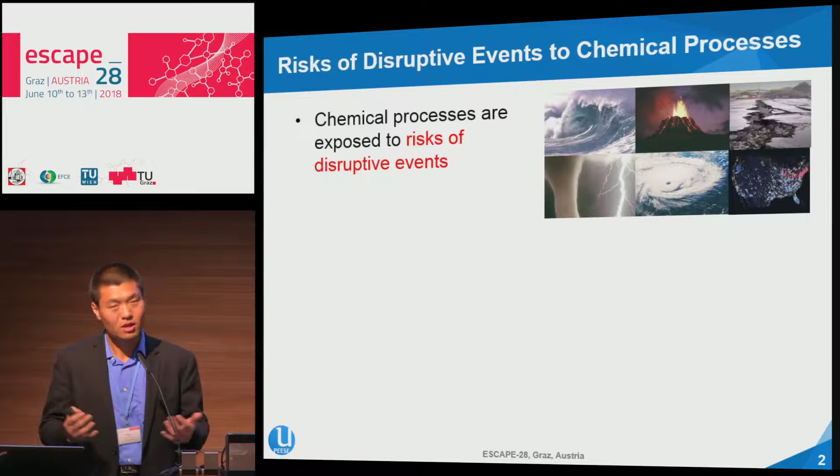So many of you have probably seen things like this, that our chemical process systems are exposed to a variety of risks of disruptive events. This could be hurricane, could be earthquake, could be tsunami, or even some kind of cyber attacks and breakdown. So there are clear evidence showing that these disruptive events could lead to critical damages and disruptions to processes.

For example, 1 year ago, Hurricane Harvey visited the Gulf Coast of the United States, and it damaged about 10% of the nationwide petroleum refinery capacity. It took more than 4 months to fully recover from this hurricane.

Early this year, one of the very large liquefied natural gas plants in South Asia, owned by ExxonMobil, was completely shut down and damaged due to an earthquake. And it took almost 3 months for them to recover from this earthquake.

So all these disruptive events have something similar in a way: they first cause disruption, then it leads to some sort of loss of performance and economic performance. So the question we want to ask is, how can we design and operate this chemical process against these disruptive events? Or how can we make our system to be more resilient?

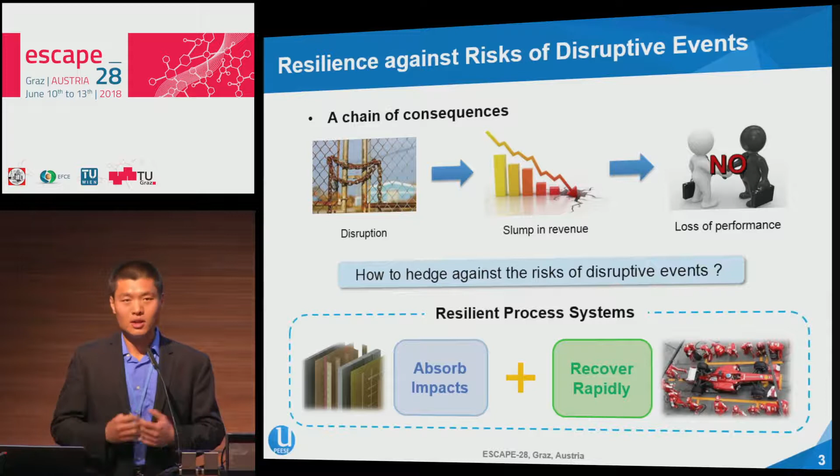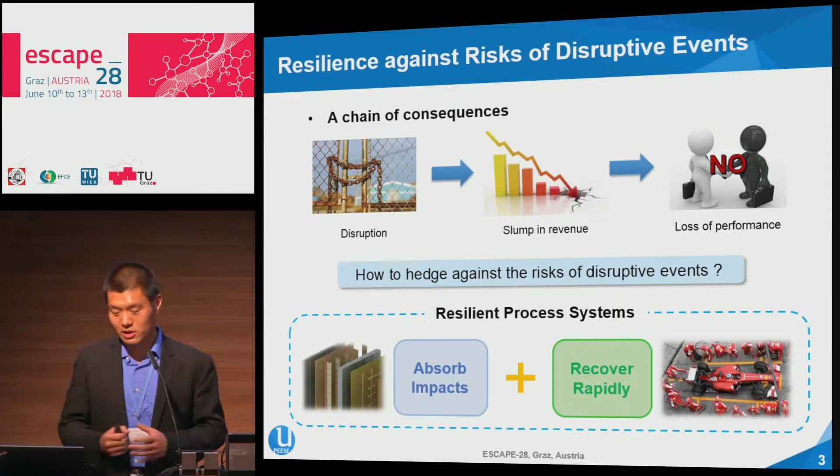In this particular case, we need to deal with 2 aspects. First of them is we want to absorb the impacts from all these disruptive events and all these uncertain cases. And the second aspect, which is quite important also, is to recover quickly from all these damages. So towards a very comprehensive resilient process systems, there are 3 major research challenges we need to address in this work.

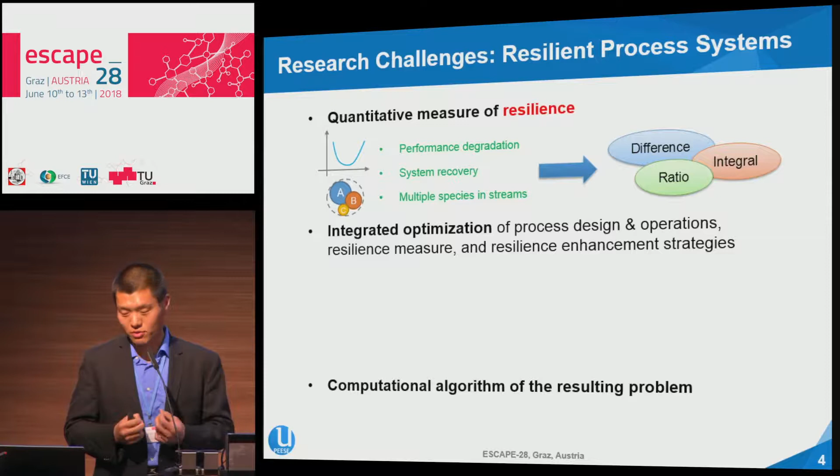The first one is how can we quantify resilience? We need to find a quantitative measure for resilience before we can conduct any kind of systems analysis and systems design. So in particular, this kind of resilience metrics should account for a variety of factors, such as performance degradation, systems recovery issues, and also more importantly, from chemical engineering perspective, the multiple species in streams in the process systems. And there could be a variety of algebraic operations involved in the calculation and analysis.

The second challenge is how can we develop a holistic and integrated optimization framework to account for a variety of design and operational decisions, to incorporate the quantitative metrics for resilience, and also to account for many possible resilience enhancement strategies, which are very important, and we'll get into this in detail in the next few minutes.

And the last issue, which many of you have heard about, is how can we address the computational challenge to avoid our computer catching on fire like this.

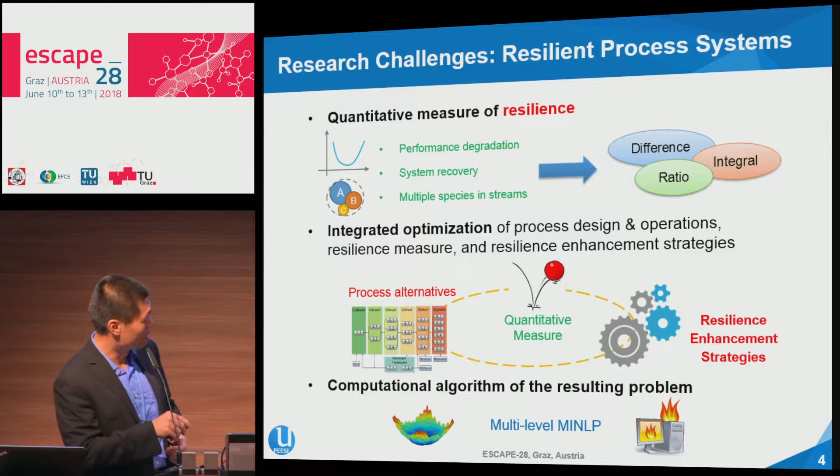So towards these 3 research challenges, the contributions of this work involve 3 perspectives. The first one is we propose a first-of-its-kind quantitative metric for resilience for process systems. This should be particularly suitable for the design and long-term planning of chemical processes. The second contribution is we propose a novel modeling framework that accounts for economics, performance, and resilience through a multi-level adaptive robust optimization approach. And the third contribution is a novel and efficient computation algorithm that could help to solve all these problems in a few minutes. So let's go into these topics one by one.

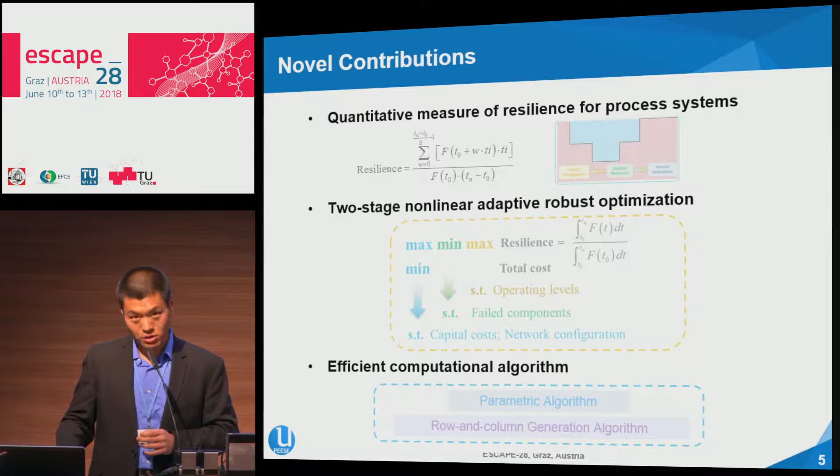Let's first talk about this quantitative measure for resilience. How it looks like after we have a disruptive event, or after we have some sort of damage to our system. So the figure here shows more like a performance curve that you could typically see in any system we're talking about. The x-axis will change with time, and the y-axis is the so-called system's performance.

When the system is under normal condition, the performance will be somehow flat, always under small disturbance, which is given at the beginning of this time period.

But let's say at time t0, we have certain disruptive events, such as hurricane or earthquake or any kind of event. Then the system's performance will degrade over time because of the absorption of impacts we have throughout the process. Then by time t1, after the impact propagation phase, the system will try to recover because of our maintenance and operating phase.

So after the system's recovery phase, eventually it will resume to normal operations going forward over time. This is the so-called systems performance curve, or the performance degradation and recovery curve, for some sort of resilience measurement.

There are many existing publications looking at resilience, but most of them, if looking at the design phase, will be more in the civil engineering or construction engineering community.

One of the most well-known, most acceptable metrics for this kind of performance looks at a ratio of two areas. The first area is essentially this blue box here. It means that if the system is running under normal condition, or could fully absorb all the impacts and damages, then how the system's performance changes over time is an aggregation over this rectangle area. This is given as the denominator at the bottom here.

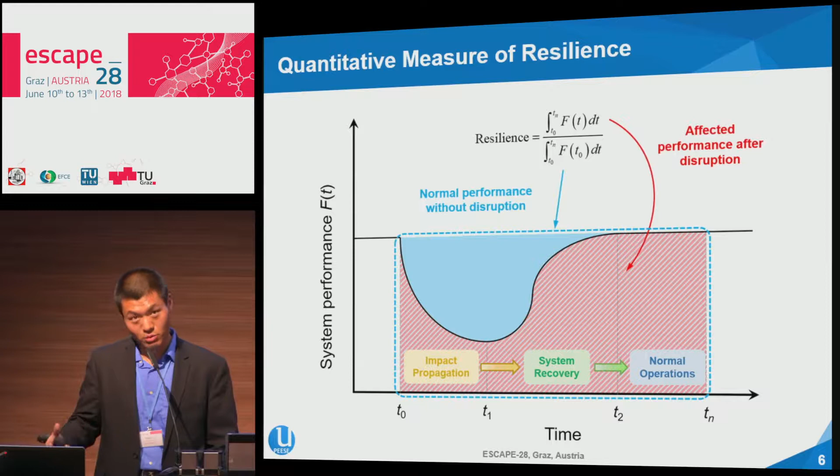So how will these metrics translate into our chemical engineering or process engineering community in particular? For most process systems, it consists of a variety of process units, and this unit could be a single reactor, a distillation column, or any kind of unit operation equipment.

So for each specific unit, there could be two modes. There's something we call a stepwise change, which people typically use in dynamic programming: either the unit is operating, then it works, or the unit fails, then it doesn't work.

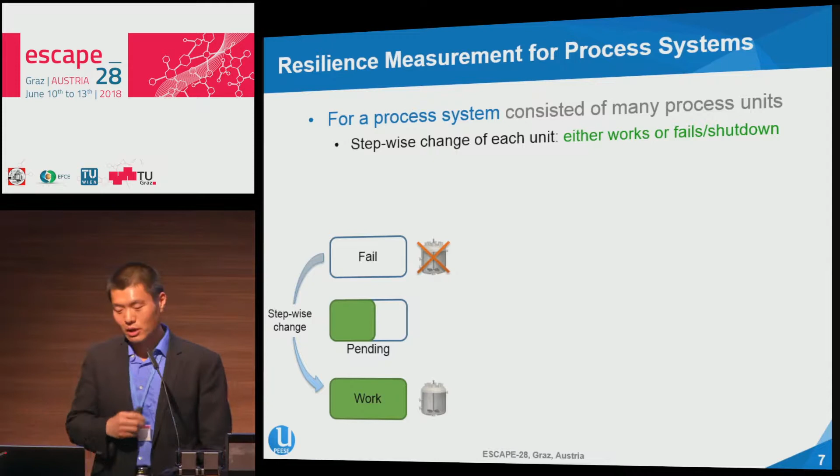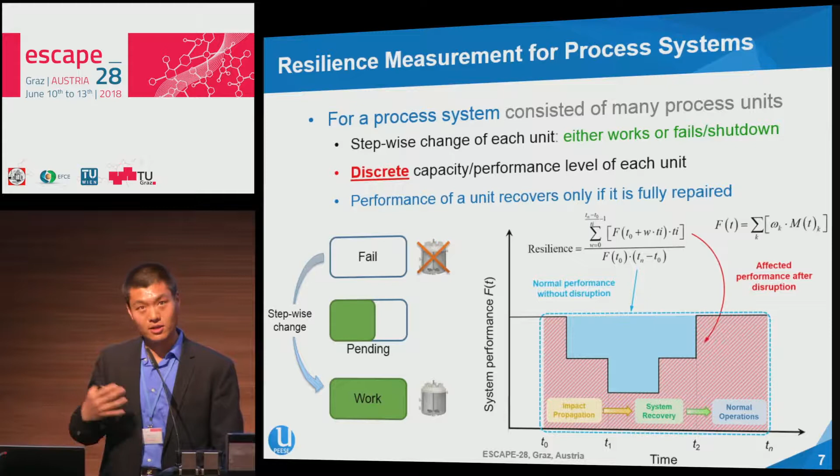By looking into this approach, we could discretize the performance or capacity of each unit, and consequently look into this performance curve changing over time with step functions. With the help of these step functions, we could translate the integral into summations over time. This is how we translate the resilience metrics to be more process engineering and systems engineering oriented for this quantification approach.

The next aspect is resilience enhancement strategy, which I mentioned earlier, and this is indeed a main difference between conventional process design—which looks into economics, sustainability, all sorts of impacts—versus resilience in process systems.

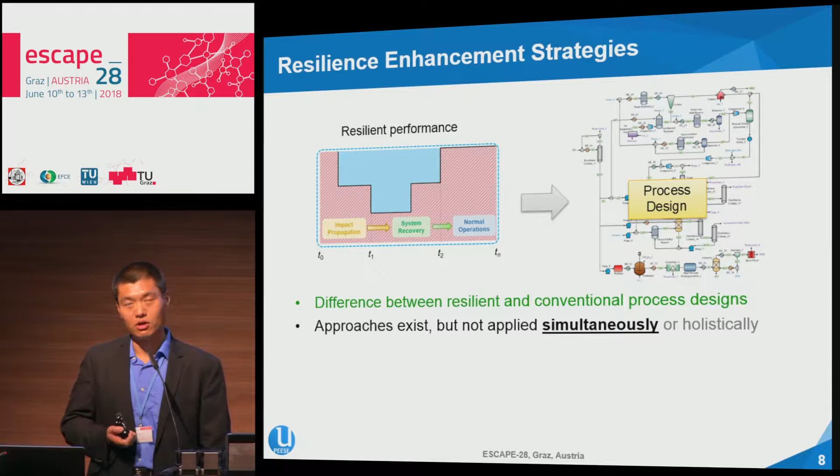There are a number of approaches to enhance the resilience of a given system, but most of them are not applied simultaneously or holistically, as you can see in this work.

Specifically in this contribution, we look into five resilience enhancement strategies, namely optimal design, extra capacity, parallel units, backup units, and optimal operating levels.

We'll get into these one by one in the next few minutes. Although some of them sound very trivial from a mathematical perspective, they are indeed widely applied in industrial practice.

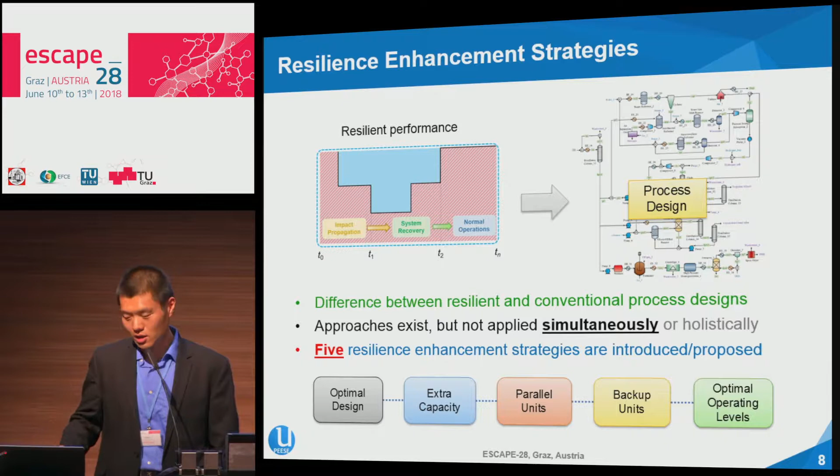The first one is called optimal design, and it's not surprising that once we want to design a process system, we want to make sure it's optimal. Optimal has many implications, and it really depends on what kind of objective we are looking for.

In this particular case, we can start looking into economics, but you could also look into the case that is most resilient or could recover the most quickly. This would essentially imply designs that give us the shortest recovery time for completing the same task. That said, there could be multiple options or pathways to complete the same task, so there are some trade-offs involved.

And the way you could model it is to introduce some sort of binary 0-1 variables to indicate the selection of units and selection of pathways. And that being said, all these design decisions have to be made here and now.

So these are for a first decision before any disruptive events or any kind of uncertain disruptions is observed. Second strategy, which sounds also very interesting and relevant, is to increase the capacity of process units. And it goes without saying that if you have some sort of pathway like this, with the feedstock going here, and you can go through producing product 1 or producing product 2.

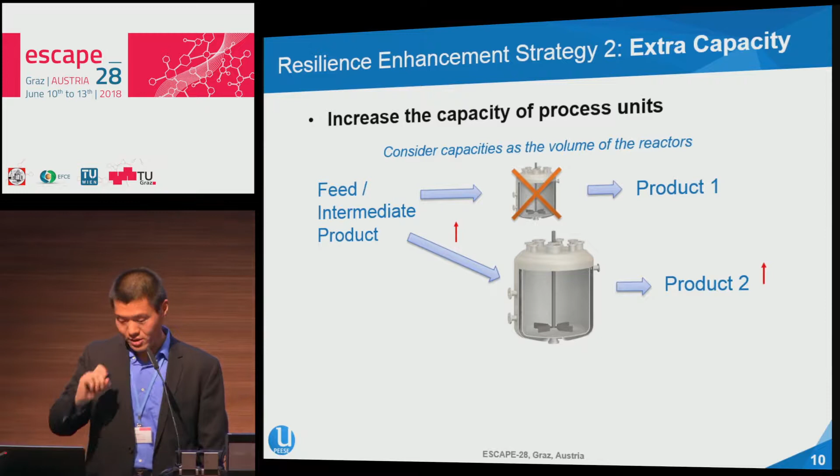So if we increase the capacity of the second unit, then in case the first unit is disrupted or damaged, the second unit could still absorb and convert all the feedstock into the products, although it could be a different product in this case. And the modeling is also very simple in the way you could look into some sort of constraints to

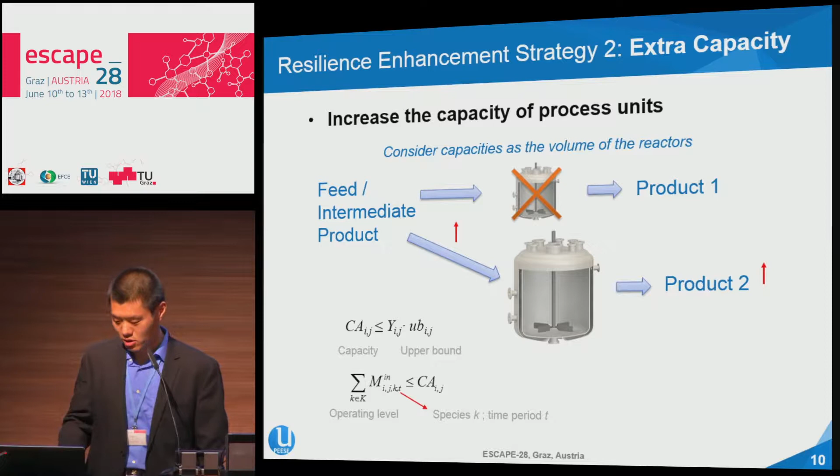capture the material flows in this strategy. The strategy 3 is the parallel unit, and essentially this is another way to introduce redundancy. So for instance, we could have a large distillation column, a separation unit to complete a separation task. Alternatively, we could separate the capacity into two smaller units.

And with these two smaller units, they could somehow enhance the resilience in case that if only one unit is disrupted or damaged, then the other one could still be working. On the other aspect, if all these units are damaged, then recovering one of them and recovering half of its capacity will be faster and more efficient than recovering everything we want to handle.

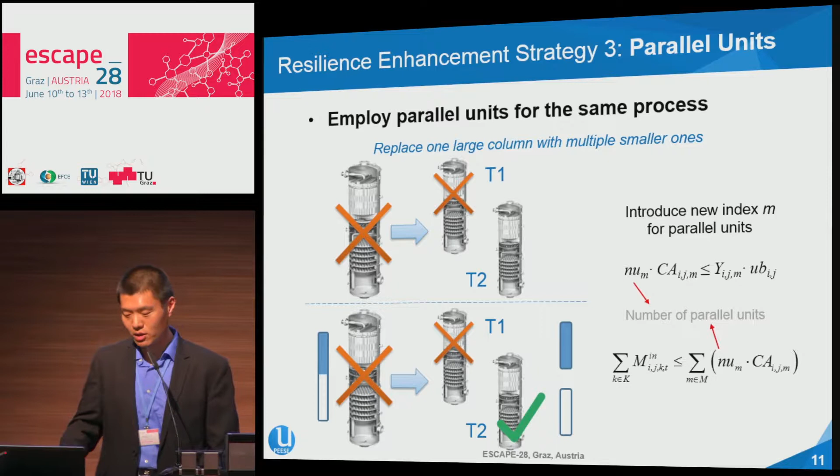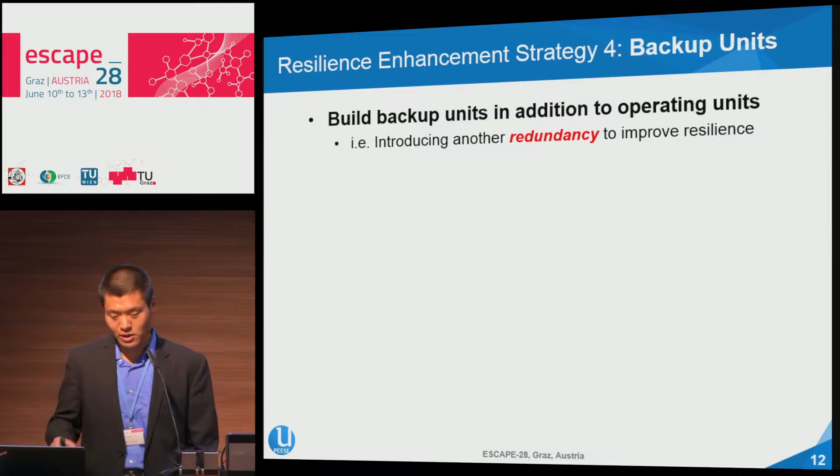So again, the modeling is trivial in the way that we could try to introduce some sort of inequalities and constraints to model this parallel unit strategy. The fourth one is another approach to introduce redundancy to the unit, and this is something you probably see quite often in industrial practice. For instance, we usually have something called backup pumps to capture all the possible disruptions of the transfer of liquid systems.

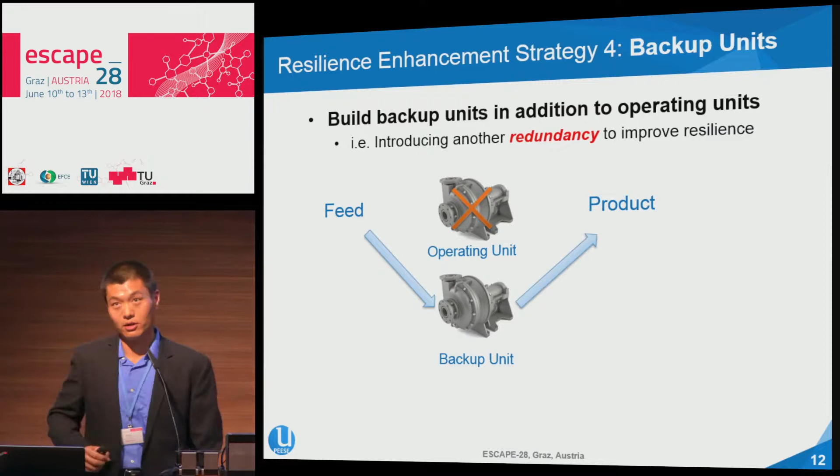For instance, you get a feed, you get a product, and going through one of the pumps. So if one pump is disrupted, then you can quickly have the backup pump to recover it and handle this fluid transfer task. So the modeling will be given as the ratio for backup capacity and the number of available processes in the equations here.

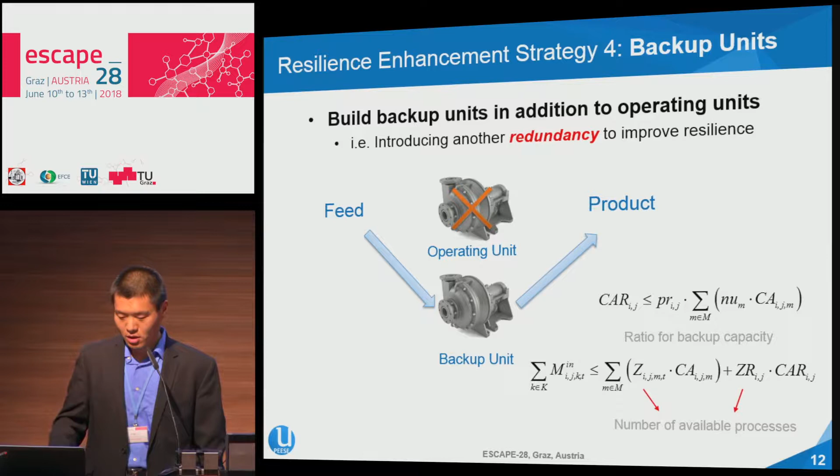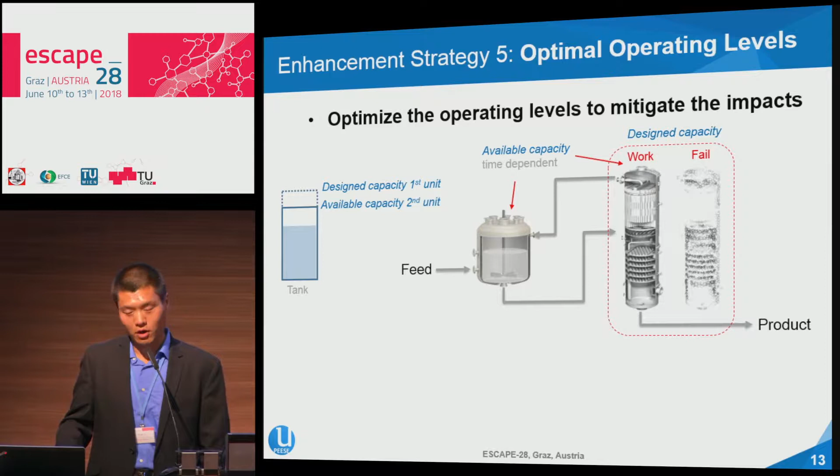The last strategy, which is something called optimal operating levels, would essentially look into the best worst case. So looking at, let's say we have a simple flow sheet like this with a reactor and a few separation units. Then if one of them has failed and the other one is working, the overall flow for the entire system can only take the one that has the minimum capacity throughout the process.

And keep in mind, we have multiple species involved in these streams. So this is one of the unique features for chemical engineering process systems. Another notable feature is that this problem will involve second-stage decisions because we will never know the real operating levels until we observe all the possible events. So this will be somehow like wait-and-see decisions that we can look into in a later phase.

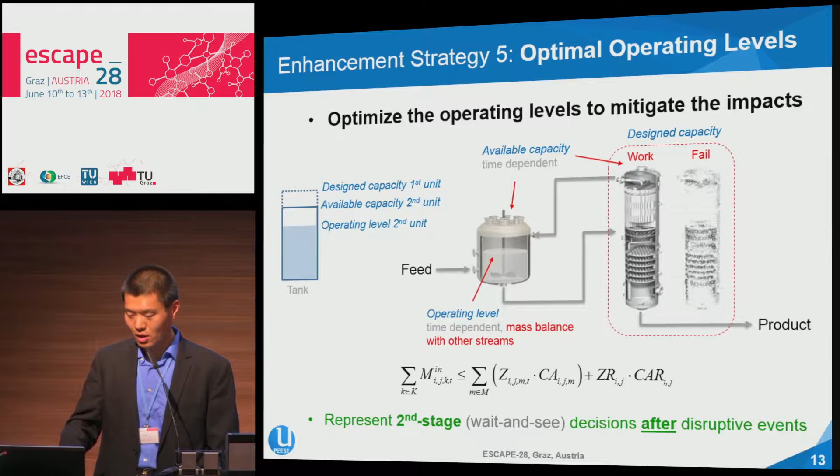So after we have all these resilience enhancement strategies and the quantitative metrics for resilience, we can incorporate them into a holistic systems analysis and optimization framework for resilience. And overall, this framework, as you can see in the figure here, involves three major steps.

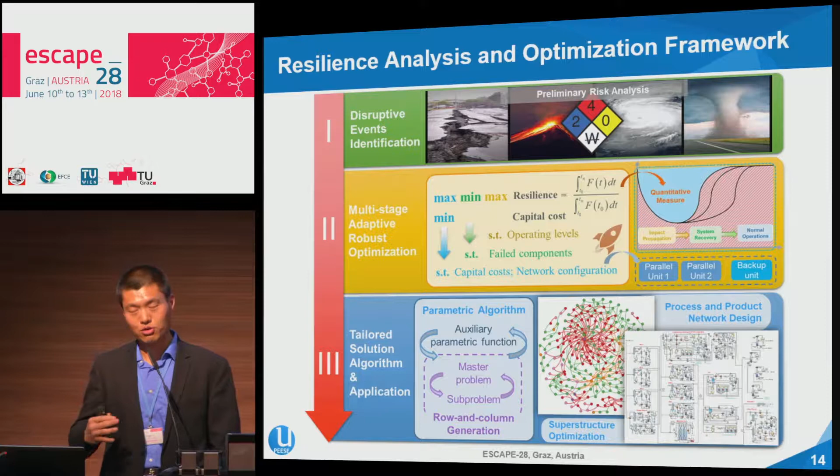The first step is to identify disruptive events, which is somehow going through the preliminary risk analysis and risk assessment, as we typically do in a chemical process design. In the second phase, we develop this multi-stage optimization model, and the third one is looking into the solution and applications.

So in terms of preliminary risk assessment, this is probably something you have seen quite often when we conduct industrial process design. In a certain way, we even look into the probability of these disruptive events, or look into the degree or severity of these events. You could generally classify them into three different categories: low risk, moderate risk, and high risk case. And in this particular case here, we only deal with the high risk and moderate risk case.

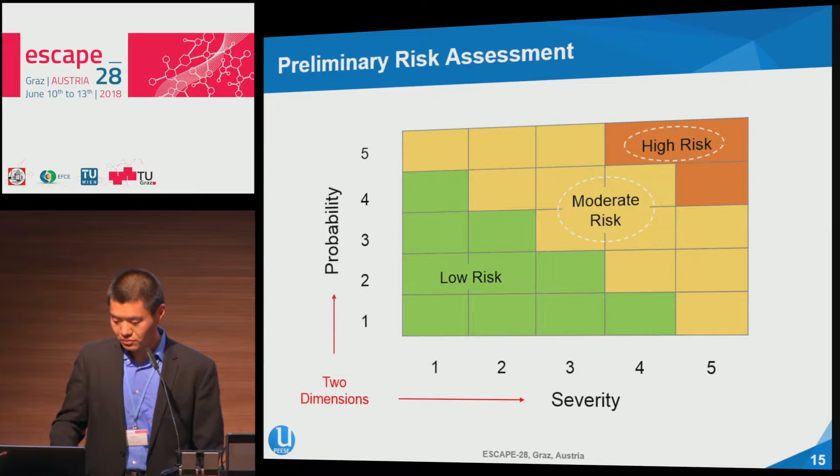Because for the low risk situations, we could most likely handle them through regular disturbance, and our control system should be able to balance them and recover the system automatically. After we conduct all this preliminary risk assessment, the next step is to develop a modeling framework and integrate optimization strategies. There are a number of methods, as you may know, that could handle uncertainty in a systematic optimization approach. This could be sensitivity analysis, could be stochastic programming, or could be robust optimization.

Sensitivity analysis is nice in that once you change the input to a certain degree of uncertainty, you automatically change the output. But the drawback is that this is pretty much a post-optimization approach, which is hard to incorporate into the design phase.

Stochastic programming aims to optimize the expected value. The major advantage is that it could handle all the probability distributions very nicely. But the drawback, on one hand, is we cannot identify the probability distribution very rigorously or accurately for all the disruptive events. And the second issue is handling a large number of scenarios could be very challenging.

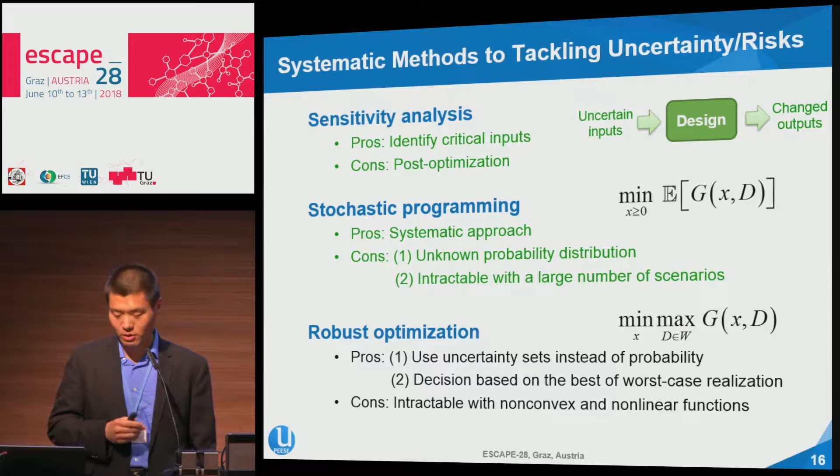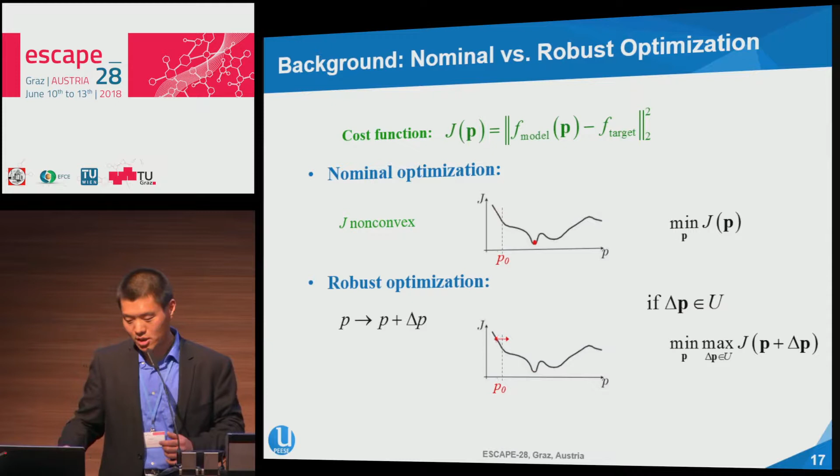So in terms of robust optimization, instead of looking at a single point, we first define something called an uncertainty set. With this uncertainty set, the point is no longer a single point, it becomes a disk, defined by the region of the uncertainty set. The way you run the optimization is you roll this disk throughout the profile. Once the disk is rolling down, what you can see is it doesn't really get trapped in this local optima, or in a region that is very sensitive or stiff to perturbations. Instead, you choose the other solution over here.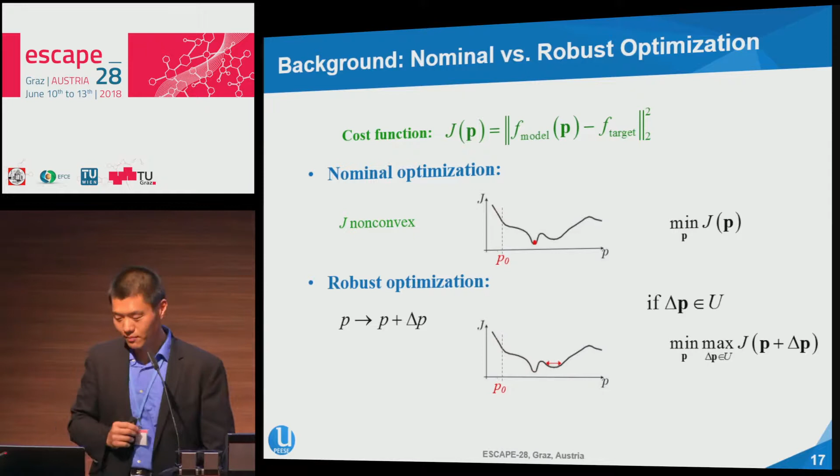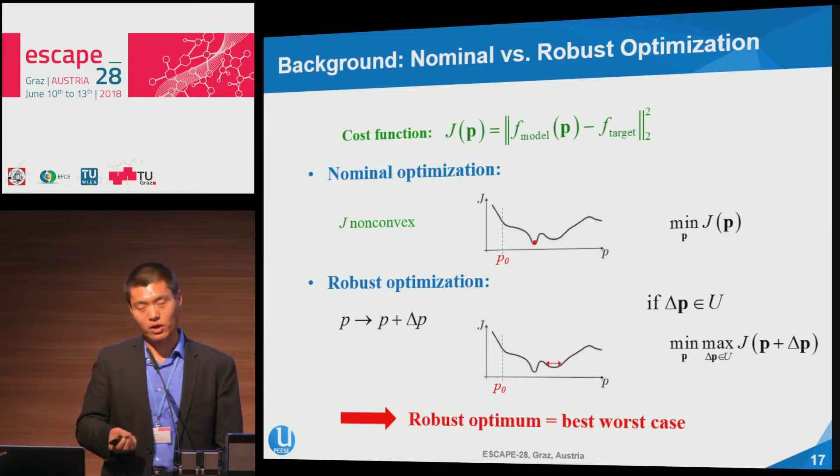So this is what we can argue: robust optima is somehow the case of looking into the best worst case. And I do want to point out that this best worst case is exactly what we are looking for in resilience.

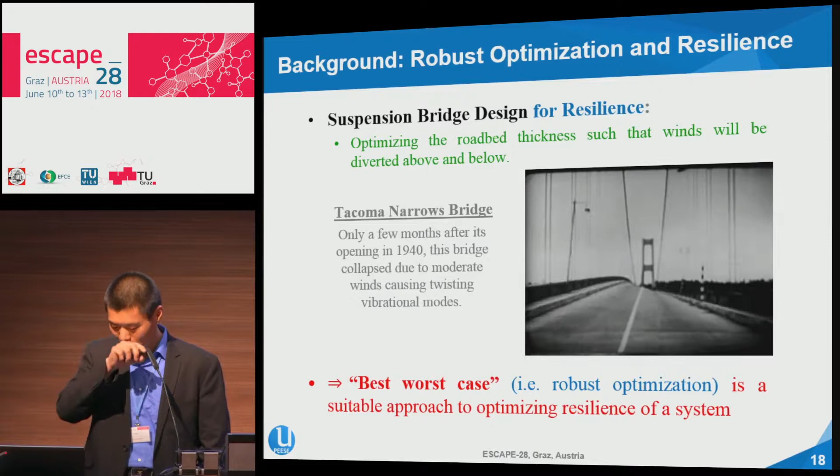What you can see here is the bridge perturbating, dealing with all these disruptions and disturbances. But what we want to do, essentially, is find a case that will perform best under the worst case realizations. So this is one illustration to show you that robust optimization could be a suitable approach to looking into the resilience optimization of a given process system. This is a concept that we have learned from our colleagues in civil engineering and construction engineering.

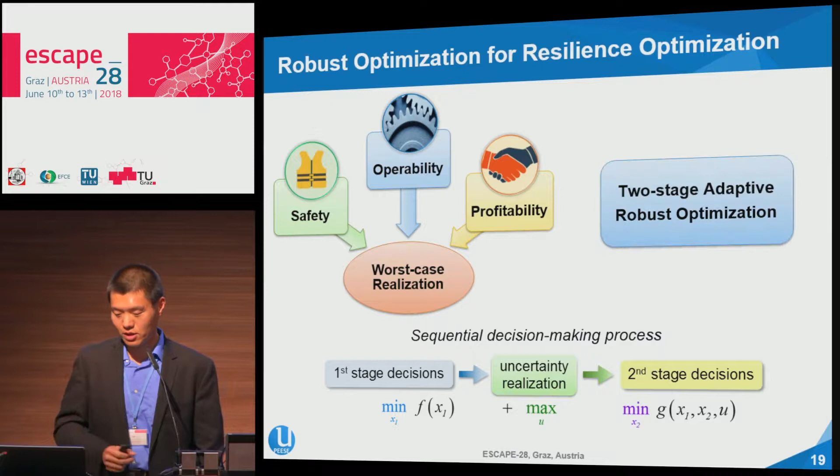Moving forward, we are looking into this resilience optimization in order to balance a variety of issues, and more importantly, to hedge against the worst case realization. This is indeed a sequential decision-making process. We need to make the first decisions — essentially all the design and network connectivity decisions — and after uncertainty is revealed, we make a second stage decision, or all the operating decisions. This approach could be formulated in a min-max-min form, ending up using something called two-stage adaptive robust optimization. Mathematically, this approach could be written in a general form like this, where we have X given as the here-and-now decision.

We get Y, which are more like wait-and-see decisions, such as the material flows and operating levels, as I mentioned earlier, with uncertainty realized before the wait-and-see decision and after the here-and-now decisions. This approach tends to be very suitable because it could well represent the sequential decision-making process we use in chemical process design, and these recourse decisions could help us adjust possible feasibility issues.

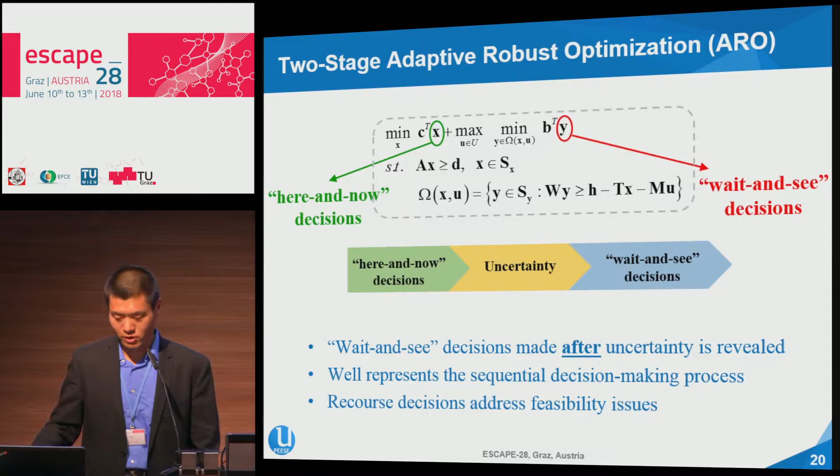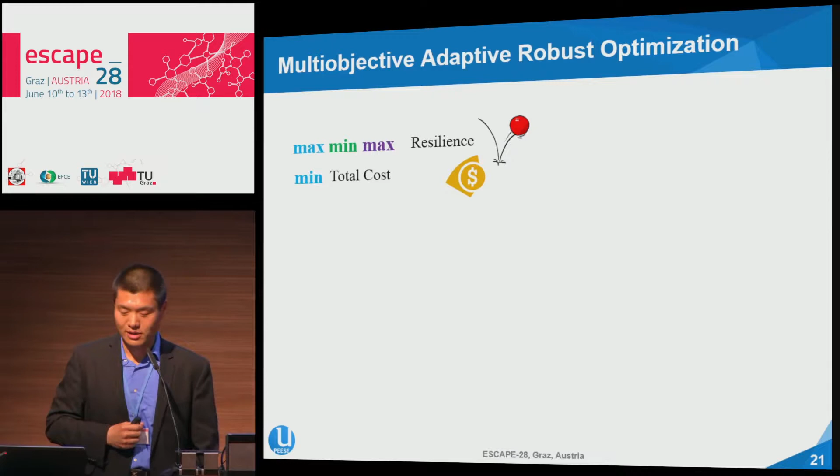For this particular case, we have two objective functions to look into. One is looking at resilience, and as we mentioned earlier, we can use a two-stage adaptive robust optimization looking into a max-min-max case. The other objective is to minimize the total cost. This was subject to a variety of constraints, such as network configuration, technology capacity, and capital cost evaluation.

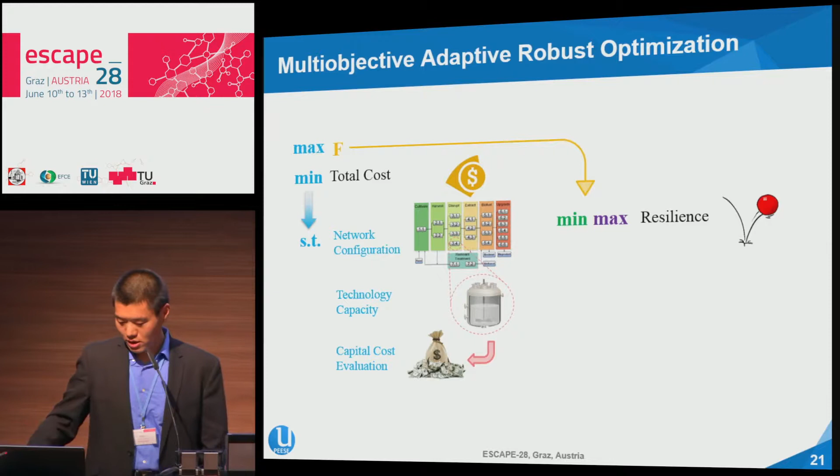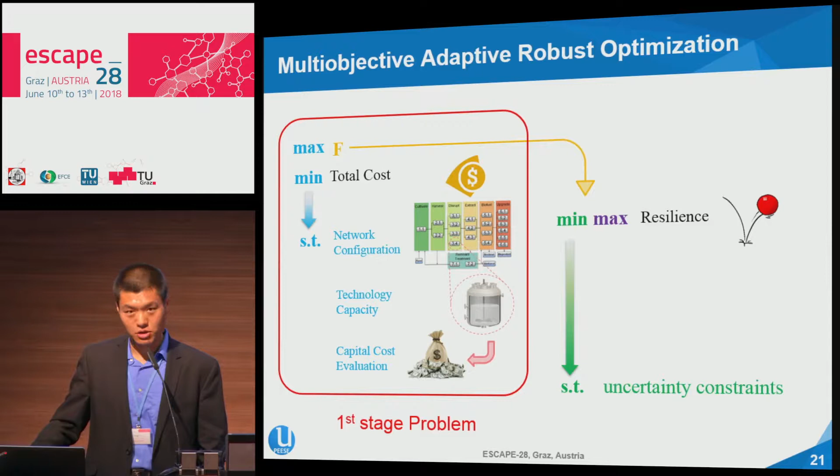For this particular case of resilience metrics, as we mentioned earlier, we had to deal with robustness and disturbance. This should be given as a min-max case here, and further account for all the first decisions that are made here and now. After disruptive events, we have looked into uncertainty constraints, and further account for issues on recovery, all the linking constraints, and most importantly, the mass balance constraints. All this second part will be considered as the second stage problem, or second stage optimization framework. So this is the overall idea of this multi-objective or bi-objective adaptive robust optimization for resilience analysis and optimization.

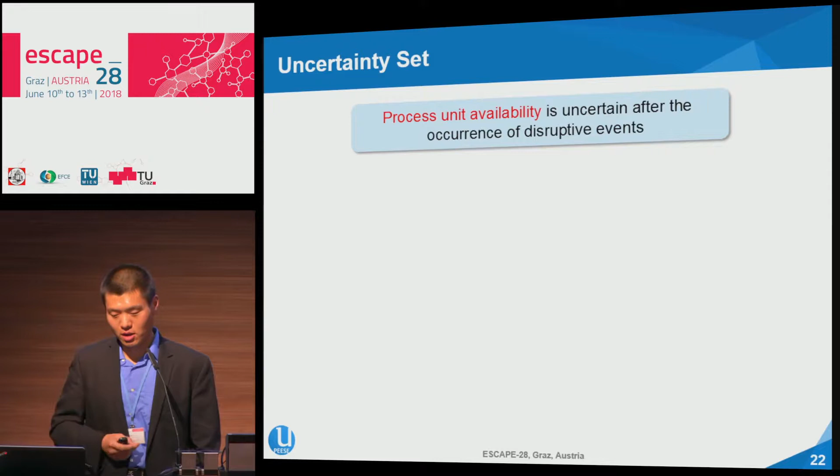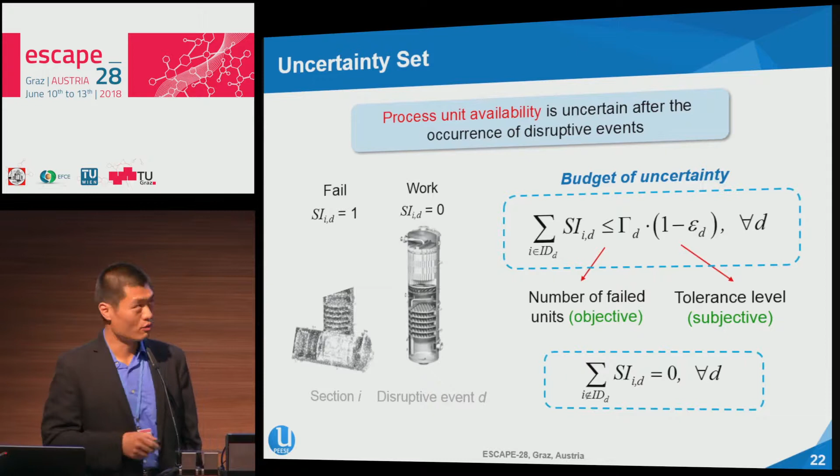The uncertainty set is one of the key issues to describe uncertainty in this case. What we use is something called process unit availability to capture uncertainty. This is something we don't know yet, but after the occurrence of disruptive events, we will have a better understanding and more accurate count. So this uncertainty set that we introduce would follow a typical budget-based uncertainty set, but involve an objective component in terms of number of failed units, and a subjective component in terms of the tolerance levels that we could handle based on this specific case.

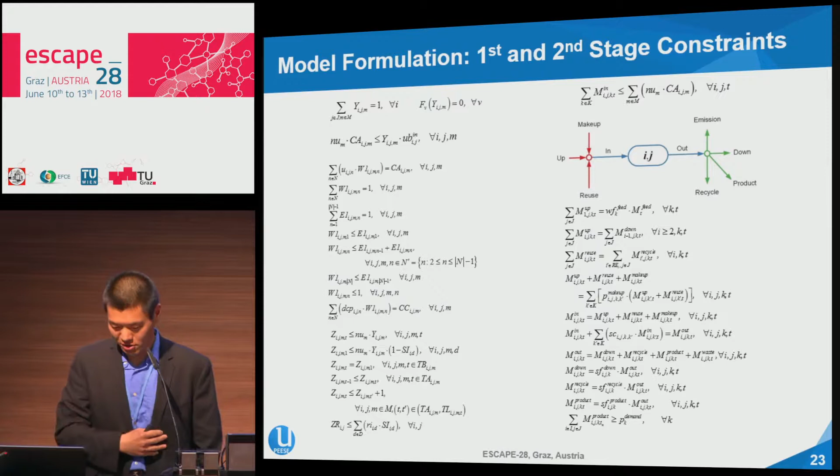Moving forward, you could write out equations. Again, don't let these equations scare you too much, because this is a typical approach in our systems community. What you can see here is we have some first decisions for network configuration, and then we have the first decisions also for technological capacity, followed by economic evaluations. All these equations are pretty much made here and now, before we design a process and before we see any uncertainty or disruptive events.

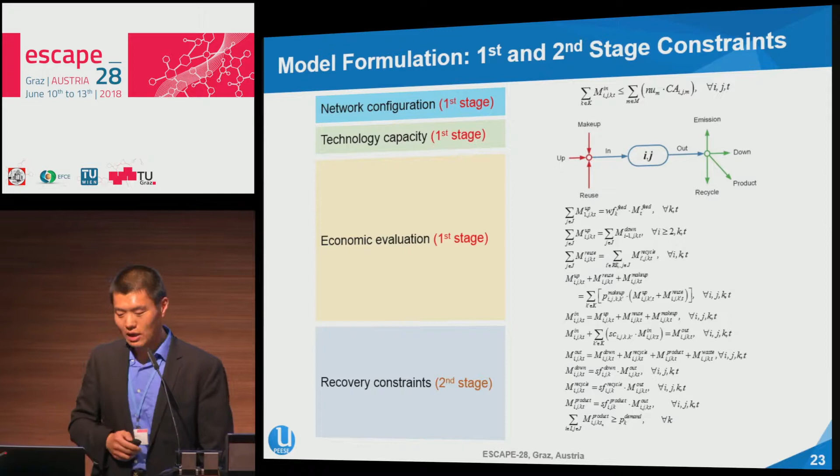Then we have a second decision looking into the recovery, looking into the linking constraints, and looking into mass balance and capacity issues. So this is the overall modeling framework in terms of constraints, and in terms of the first and second stage decisions.

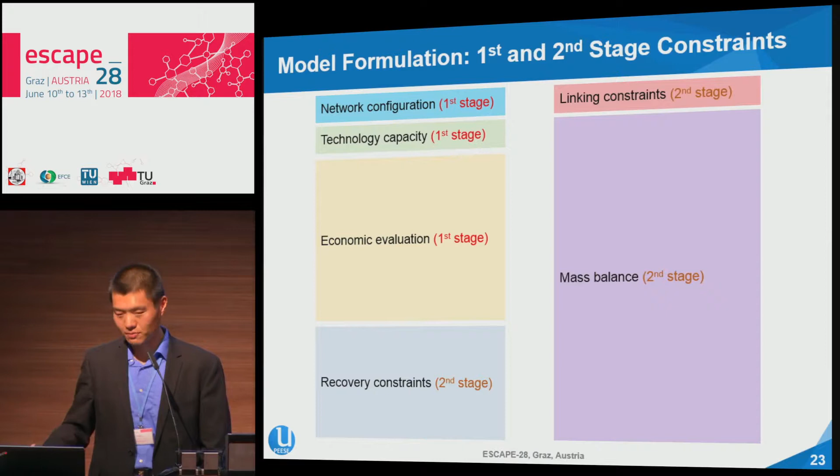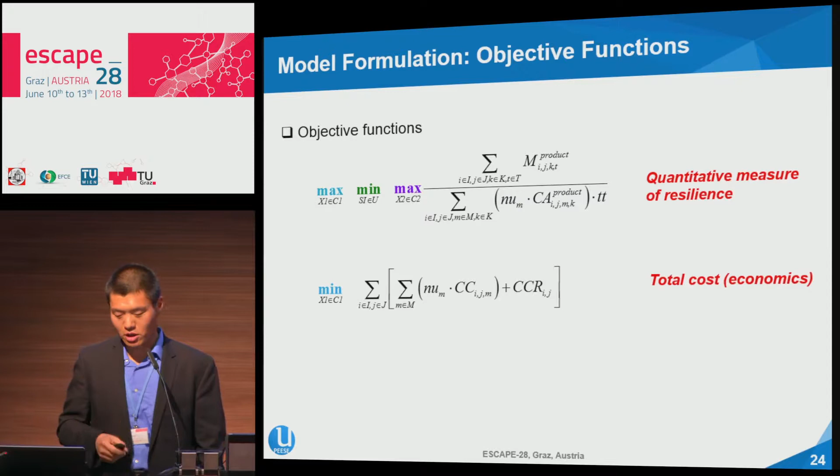In terms of objectives, as we mentioned earlier, the resilience metric will be given as a ratio form of real performance value over time divided by the ideal or theoretical performance over time under normal conditions. This will be given as a max-min-max form. The other objective, looking at the total cost in terms of economic performance, will be given as a mixed integer linear form. Both objective functions in this case reflect the intrinsic properties of the process system we are studying, and this will be a unique feature for this particular framework.

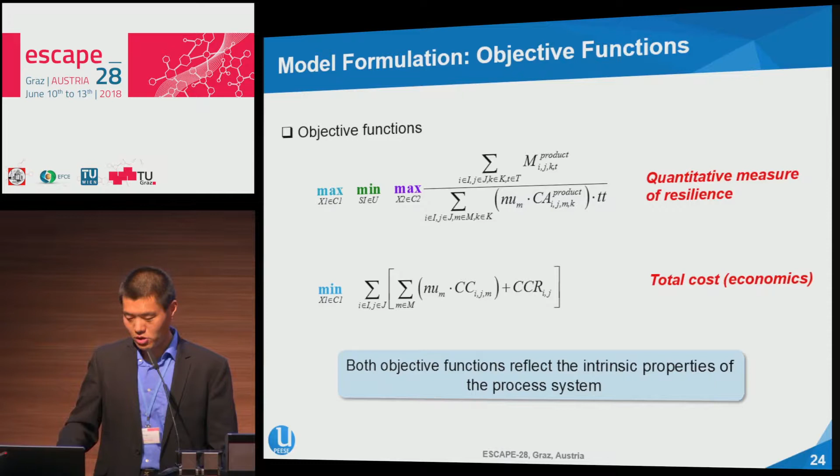The next issue we need to talk about briefly is how to solve this problem. As we mentioned earlier, robust optimization is very powerful and efficient to capture all the uncertainties and could be useful in this particular framework. But the challenge is on its solution. How can we solve something with 3 operators: max, min, and max? This is one of the challenges. The second challenge is we have 2 objective functions.

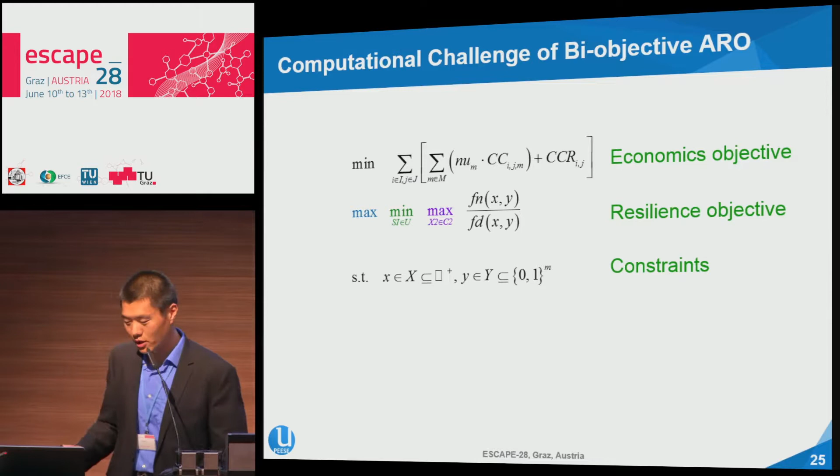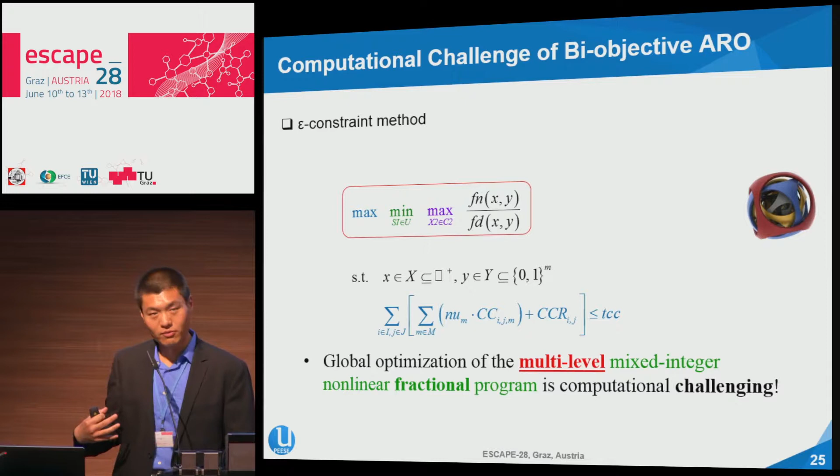One thing we could do, well sorry, this is x belongs to the real value—I think for whatever reason the computer did not display it. We could use something called the epsilon constraint method to transfer one of the objectives to the constraint, and this is something very straightforward. After you make the transfer, it becomes a single objective problem. But still, this single objective problem is pretty much a multi-level problem, kind of nested, 3 levels nested all around. And it's also involved with nonlinear terms and fractional terms in both the numerator and denominator.

So this problem tends to be very computationally challenging—multi-level optimization, mixed integer nonlinear optimization in particular. It could not be solved directly using any off-the-shelf optimization solvers, and this non-convex problem really needs some sort of global optimization algorithm to guarantee the solution quality.

So let me spend a couple minutes to show you how this approach could be tackled by investigating fundamental theory and algorithms in mathematical programming.

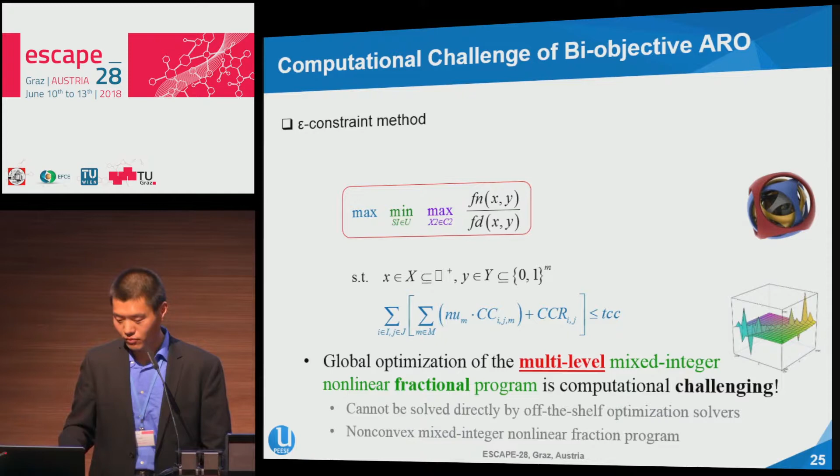First thing we can observe is this fractional term here. This was borrowed from an earlier series by Dinkelbach back in the 1970s, but also some studies in my group in recent years looking into a kind of parametric algorithm. The main idea is: for any mixed integer fractional problem like this, given as a ratio of two functions, you could look into its parametric subproblem. This parametric subproblem is essentially an embedded optimization problem, introducing parameter q and making it a minimization of the numerator minus q multiplied by the denominator.

So f(q) here is exactly a function, but it doesn't have an explicit algebraic form. What we could prove is that if we could find the value of q such that f(q) equals 0, then by solving this single level optimization problem — minimizing N minus q multiplied by D — with the optimal objective equal to 0, the solution to this problem will be exactly the same as the global optimal solution to the original one.

So that's exactly what the theory is all about. We can further prove that this function f(q), although it doesn't have an analytical form, has a very interesting property: it's concave, continuous, monotonically decreasing, has a unique solution when f(q) equals 0, and the subgradient for any value will be the negative of the denominator. These results were presented, I think 2 or 3 years ago, back at PSE in Denmark.

With these properties, we could really try to design an algorithm using numerical root finding measures. We start from an initial guess and then take these subgradients. Each time we solve this inner problem, we get an objective value and also a subgradient for free. So you can iteratively solve it until eventually you reach the optimal after certain iterations.

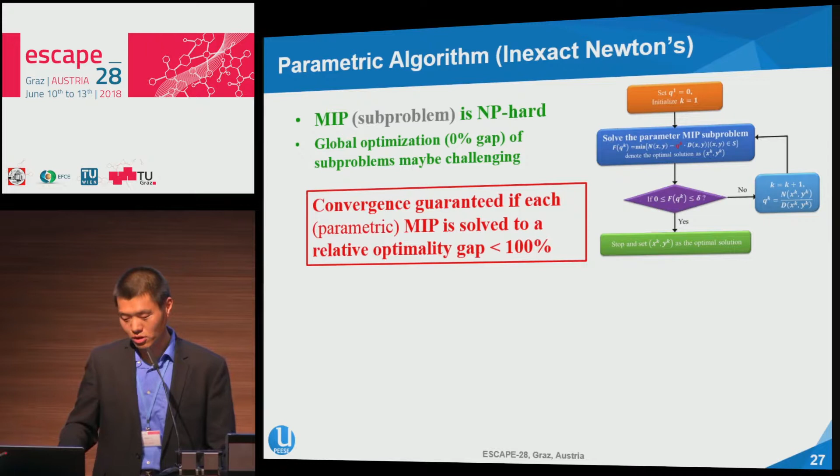So once we have this parametric algorithm, we introduce solving a sequence of subproblems and iteratively reach the optimal. One of the most powerful features here is that each subproblem does not need to be solved to global optimal. Instead, one of the interesting theories we introduce is: once you can solve these subproblems to any feasible solution within 100% global optimality gap, it will be fine to move forward and eventually guarantee convergence to a global optimal solution. This is something we call the inexact Newton's method, for applying to this problem.

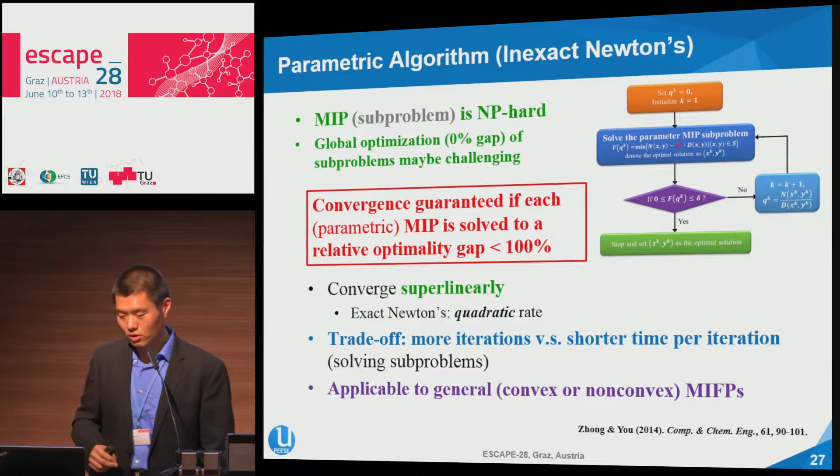This is a very powerful approach that could apply to any kind of convex or non-convex problems, even multi-level optimization problems. So we embed this approach into the framework we are dealing with — a max-min-max problem with a fractional term. We look into the parametric subproblem and eventually take these steps to solve to global optimal.

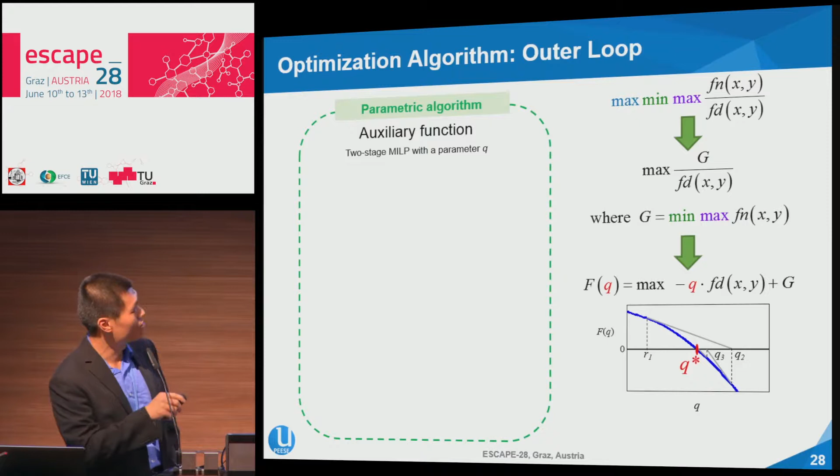The key idea here is that each subproblem will end up being a 2-stage adaptive robust optimization problem with mixed integer linear problems embedded within it. So all we do is follow a row and column generation algorithm by decomposing into a master problem and a subproblem, iteratively solving them.

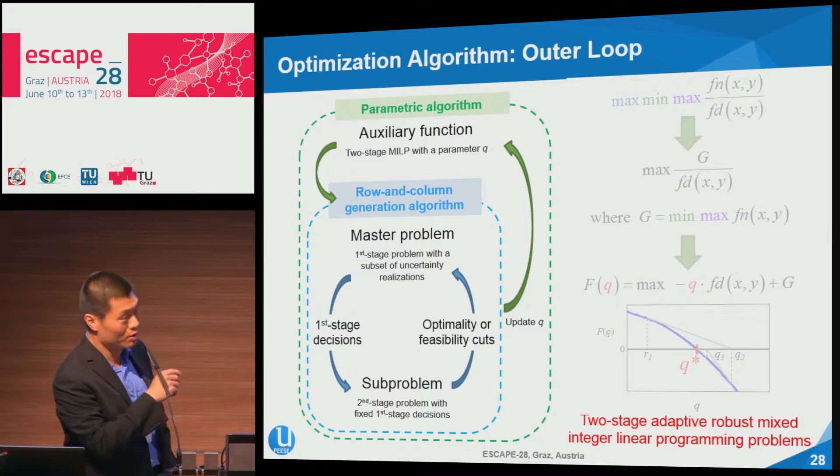We add optimality cuts and feasibility cuts until eventually the solution converges. The main idea is, through partial enumeration of all the extreme points in the inner problem, to eventually convert this multi-level ARO problem into a single level one.

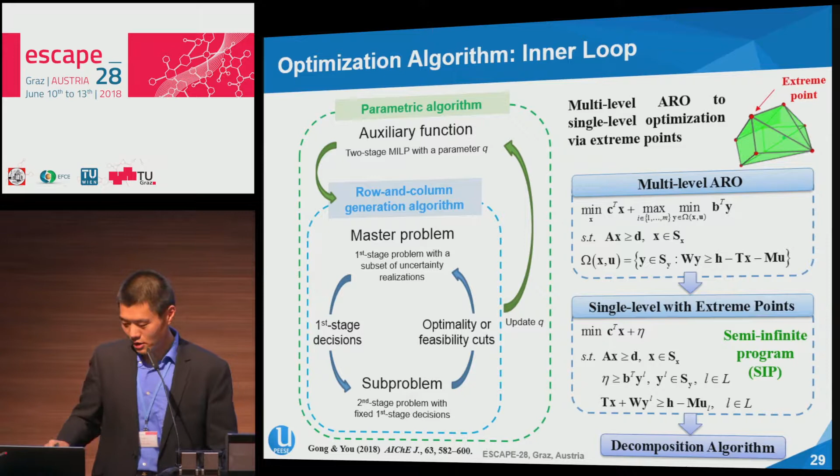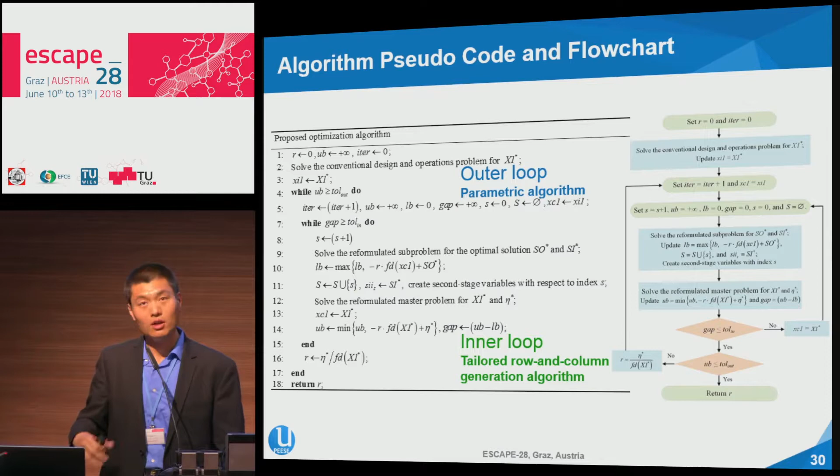So that's the end of the theory. Let's see how this approach could be useful and applied to some of the real applications we usually talk about. First, looking into a typical process network problem taken from earlier work by Professor Grossmann and others, a classical approach we have been looking into in our community.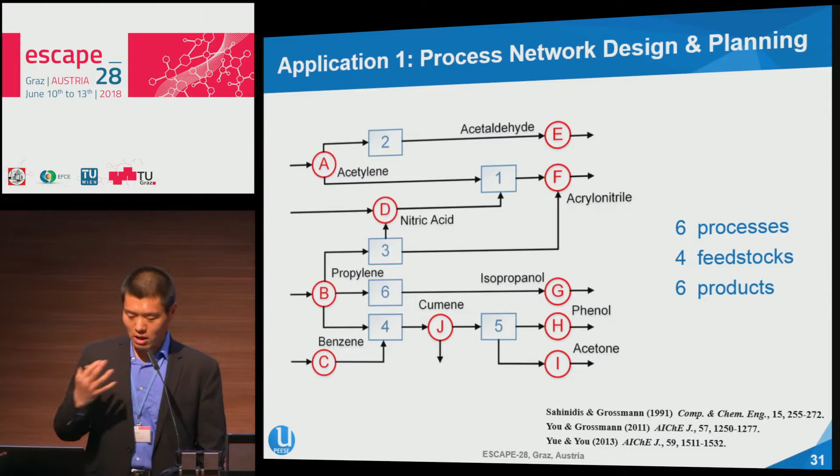This is a process network involving 6 process units, 1 through 6, as you see the numbers here. There are 4 feed stocks, as you can see over here, plus 6 final products. We try to see, under disruptions, how these chemical process systems will perform and how the resilience will look. So the first thing is, how can we solve this problem?

Solving this problem is not trivial, but with the algorithm I mentioned earlier, you can see that getting all these solution sub-problems generally takes one minute, or at most two minutes. This really shows the power of theory and algorithms. Once you know how to tackle the problem, it can be handled in a very effective way.

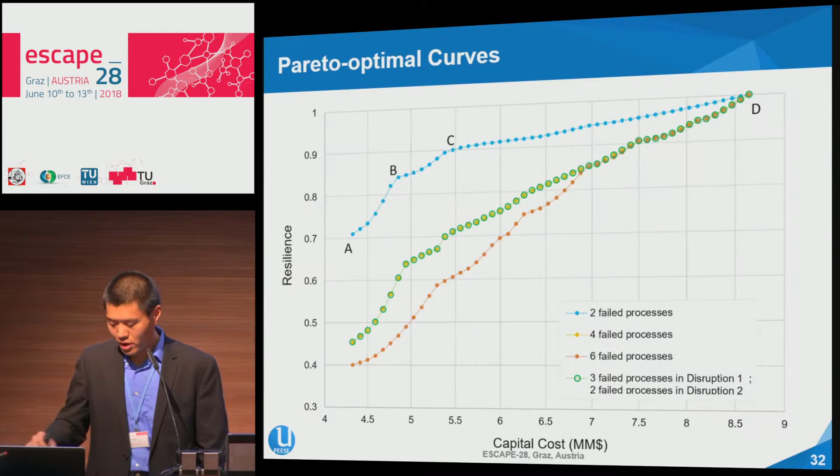Once you look into this problem itself, you do see multiple Pareto-optimal curves. Essentially, the x-axis shows the economic objective, and the y-axis shows the resilience. As I mentioned earlier, resilience is defined as a ratio, so it's between 0 and 1.

For any process, once you design it without considering resilience, it still involves some sort of resilience. That's what you have on the left-hand side here. Even if you don't expressly design these processes to optimize resilience, the optimal design, by minimizing cost, already gives you certain resilience. This value will depend on the specific disruptive events we want to hedge against.

For instance, the blue curve here is for a case where a disruptive event could fail 2 of your 6 processes. The current optimal design gives us about 70% resilience, even though we don't optimize it directly. But you could invest more by looking into resilience enhancement strategies, introducing redundancy, optimizing the design and operating levels, to improve resilience from around 70% all the way up to 100%. The price you pay, as you can see in the figure, is that we had to increase the cost, almost doubling it throughout the process.

Similarly, if you compare these different curves at different levels of disruptive events, from the mildest to the most serious, this resilience variable will decrease. However, the ultimate solution with full backup units and full redundancy will always give you 100% resilience, at maximum investment cost.

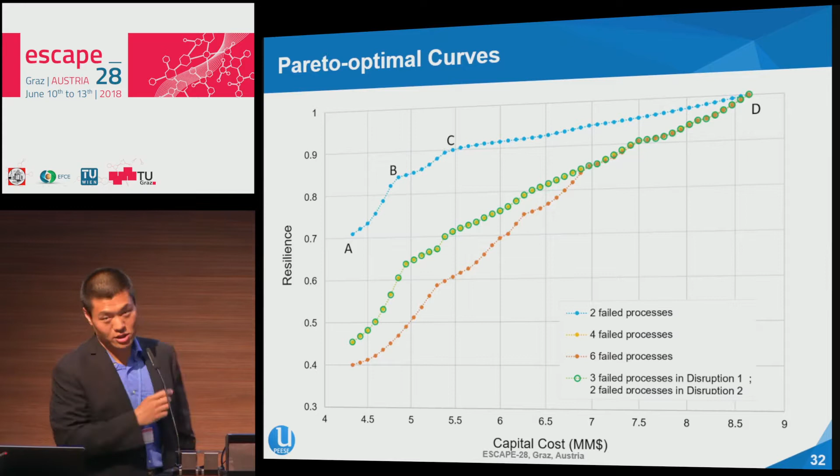So what specifically do these solutions look like? Here are the results. As mentioned earlier, A, B, C, D are four possible solutions, and each ends up with a different design. Solutions A, B, and D end up with the same design, where only process 3 is not selected, while all the others are selected. In solution C, it turns out all the processes come online, but in addition to this conventional design, we also need to look into redundancies and backup units.

The figures here show the capital cost for each process and each possible solution. In solution A, the minimum cost solution, we just build all the processes we need, and that's it — we don't introduce redundancy. In solution B, which increases redundancy slightly, you can see a little orange bar here: for process 4, we have a bit of redundancy with smaller capacity to hedge against uncertainty.

The system identified process 4 as one of the most vulnerable processes that has to be protected against all disruptions. Once you increase the resilience further, you see a bit more redundancy on process 4, and also a little bit on process 5.

In the last solution, with full redundancy, essentially all the processes have backup units — process 1, 2, 4, 5, and 6 all have backup units just to hedge against uncertainty. This translates into the performance recovery curve you see on the right-hand side. In the first case, if you don't introduce any redundancy, after disruption the productivity will reduce, and it takes some time to recover over the period.

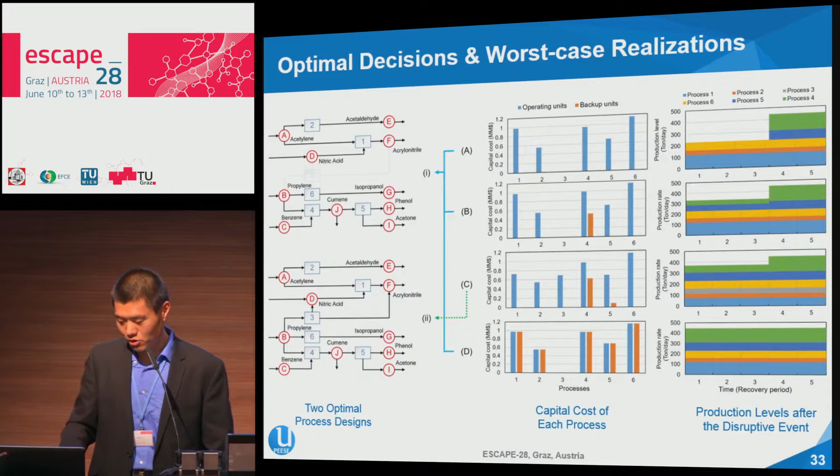So if you revisit all the resilience enhancement strategies that we mentioned earlier, what you can see is in all these 4 designs, we choose both optimal design and optimal operating levels. But of course, operating levels will be different based on the specific design we choose. In addition, extra capacity and parallel units turn out to be not so optimal, at least from the decisions we are choosing here and from this specific problem.

However, backup unit is something we do choose as one of the most effective strategies. For instance, in point B, we have 1 backup unit, but not at full capacity. In process C, similar but slightly larger capacity, but in process D, we end up with all the process with full backups.

But certainly you can try to increase the capital more than double to make it almost 100% resilient against any disruptive events. So the optimal choice here, we end up starting from raw shale gas, and then choose DGA for absorption, acid gas removal, and go through the condensation, eventually looking to integrate the natural gas liquid recovery and separation process. So looking into these worst case realizations, what you can see is there are a few solutions we call E, F, G, H.

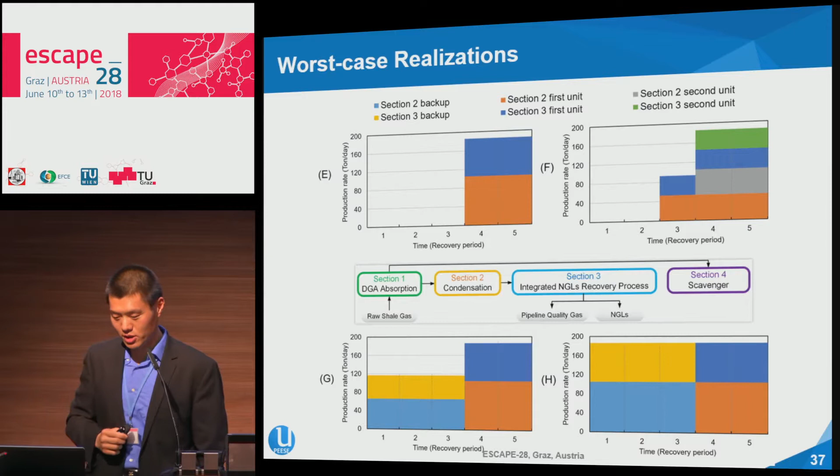Keep in mind E is the one with the minimum cost, and H is the case with the maximum resilience. So the main difference here is in case E, after disruption, the performance decreased to 0 right away, but it takes some time for everything to recover and fully go back online. But for case H, because we have sufficient backups and redundancy, after disruption nothing will be affected, and we can keep moving on with the same process to ensure 100% resilience in this specific realization.

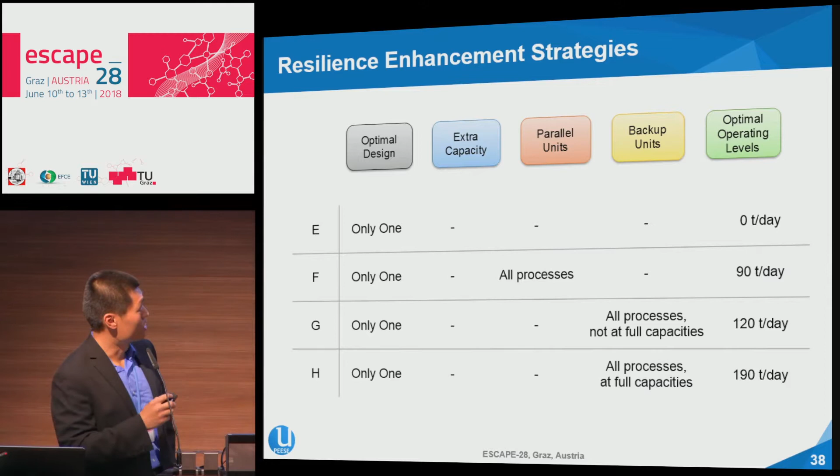So let's revisit the resilience enhancement strategy again. Optimal design and operating levels are the same for all these designs, and these are always something we have to follow. Backup units were selected for some of the solutions, the last 2, but not all of them. While in the second case here, we tend to choose parallel units for all the processes to maintain the resilience.

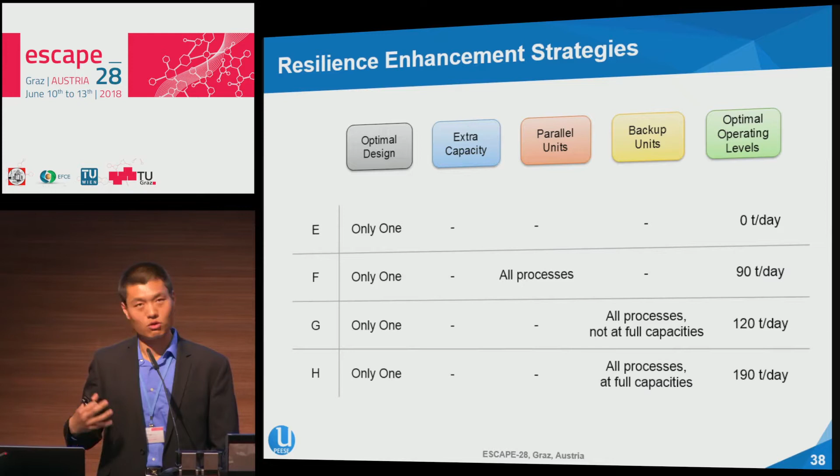So this really shows the trade-off between all the resilience enhancement strategies. It's hard to say which one is more important. Maybe optimal design and operating levels are always essential, but among the other 3 — extra capacity, parallel units, and backup units — they have pros and cons. The system, or this framework, could automatically select the optimal one based on a specific design and synthesis task.

So last thing is about the computational performance. As we mentioned earlier, our algorithm is pretty much a combination of a parametric algorithm and a row and column generation algorithm. So in the row and column generation algorithm, we produce an upper bound and lower bound in each iteration, and they keep going until they eventually converge.

So we have to go through these 2 steps for the parametric algorithm, starting from an initial value of 0 and coming up with an optimal value of 700 or something, and then we put it into the original problem and resolve it, ending up with a parametric value equal to 0, which really gives you the global optimal in the end.

So let me conclude. We have a very nice framework in this case that offers an alternative perspective for designing and operating process systems from a resilience perspective.

And so this is not the same as most of the existing resilience concepts we use in process control, but alternatively offers an interesting perspective, looking at this problem from a design and synthesis perspective.

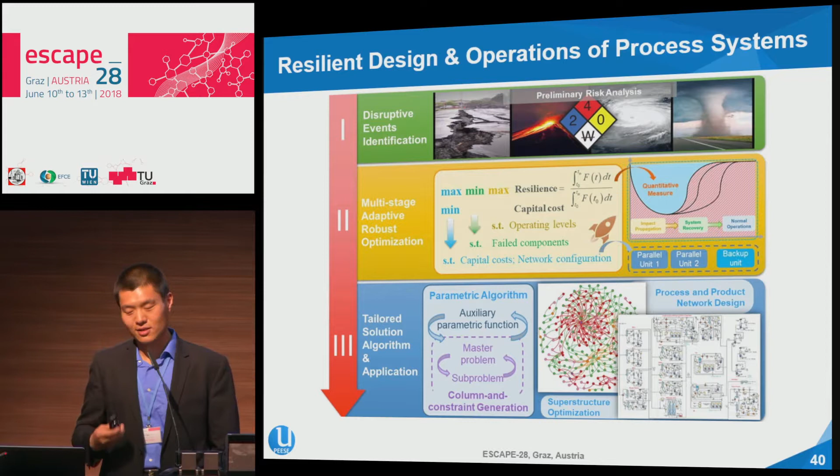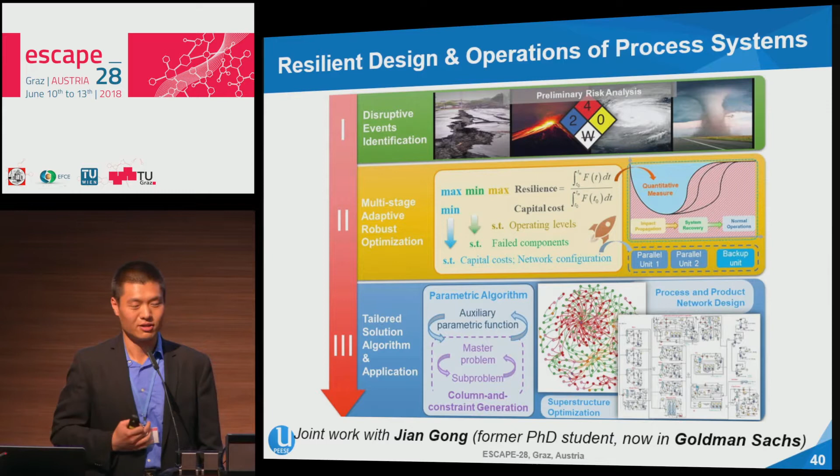I want to acknowledge the student who worked on this project, Jian Gong, who just received his PhD a few months ago. Sometimes we haven't really found a direct application in the chemical industry for this framework, and some of our financial competitors just quickly grabbed him, and he's making a lot of money right now. So this is probably one of the issues we face in our community: how to retain and attract our very best students to continue working on very interesting and important problems.

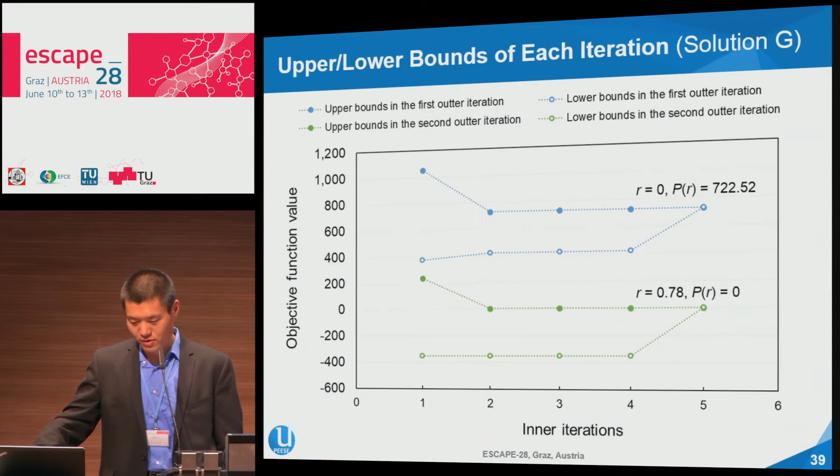First, do you really need to have a process that is so safe and so resilient? If yes, you will be willing to understand and invest more. More important, we call this framework resilience analysis and optimization, so optimization is an add-on but not necessary. Even if you design a process without accounting for resilience, we understand how resilient it is against all events, and that could at least give decision makers some kind of guidance. It's the same as choosing a car - do you want a sedan, an SUV, or a Rolls-Royce? It's all personal decisions, but at least this is a framework to help us quantify how the existing system could hedge against all possible outcomes, if one wishes.

Thank you for a very interesting presentation. This is a bit of a follow-up to the two previous questions, because in the end resilience can be translated into cost - if your plant is not resilient, you get loss of production, etc. You'd have a similar basis to analyze it, because if you have the 1000-year event, a resilience of 0.7 may be good enough, while if it's much more often you may need 0.9. So have you considered looking at it from that perspective?

Exactly, so I think there are two aspects we could look into. For instance, if you're building a plant in the Gulf Coast, say in the Houston area, you see hurricanes almost every year - then you can use a data-driven approach to come up with some sort of uncertainty set or quantified information. In certain areas, like Fukushima in Japan, a very nice example, they look into these events every hundred years. Then you could really look into resilience from the decision maker's perspective: are we willing to invest, doubling the investment, just to avoid these public disasters? If the answer is yes, then we would do it. But I bet in most cases, if it's an individual or private organization, they will most likely go with this value. The key idea of this approach is to show them that even if we go with the optimal design in a conventional way, resilience is not zero - it's not too bad, but not so good. So if someone is willing to enhance the resilience, they probably have to double the investment. This is very much consistent with what you can see in these kinds of disaster events.

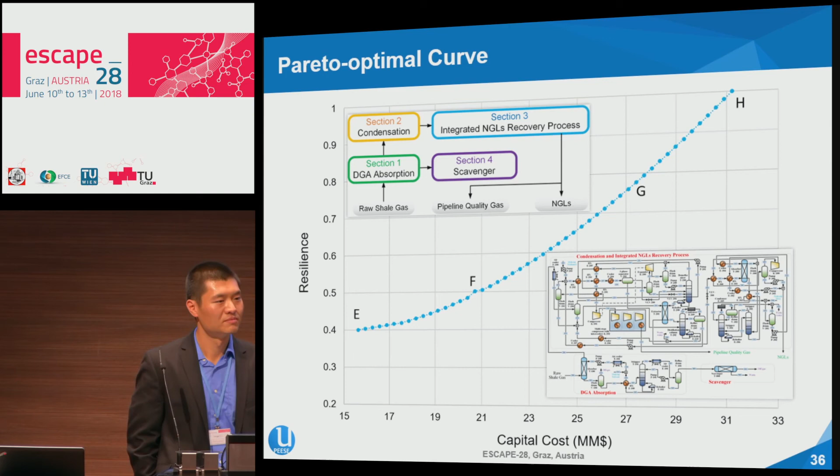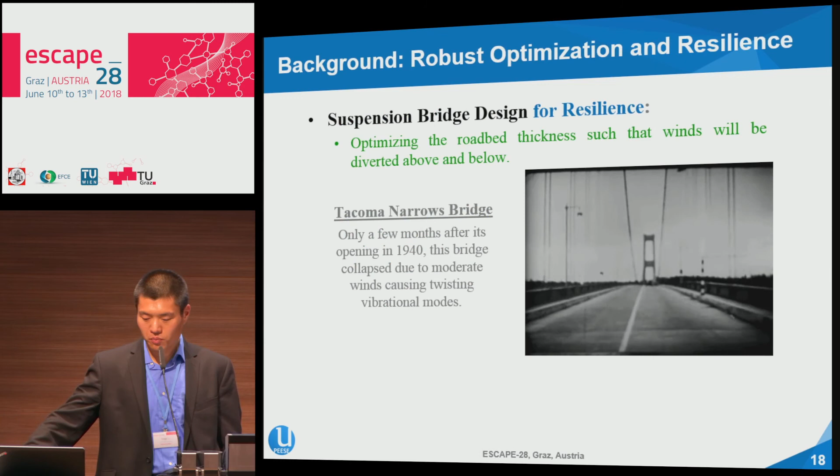Okay, thank you for your presentation. I'm João from Técnico in Lisbon. We can increase resilience both through robustness or flexibility, or through redundancy, but that makes us always make an assumption about a disruption. How can we manage risks that might be known-unknown or even unknown? Do you have any suggestion to make it broader, in terms of supply chain or process, to deal with this latter kind of resilience?

Thank you for the question. I guess an easy answer was really about this figure - it's exactly the case when they built the bridge, they did not really account for all the things they should think about, and it eventually caused the disaster. So in the end, this is really much a decision maker's perspective - they need to balance all kinds of factors, and getting data is indeed difficult. That's why in the end we don't go directly with a probability approach, because that requires a lot of accurate information. Instead, we look into the system itself, the process system as a physical condition, and see how these conditions could be enhanced and modified, at least to avoid some kind of catastrophic disaster like this case. But certainly the framework, as we're speaking now, could be extended to looking into supply chain resilience. We could apply it to nationwide economic systems, and also to global economic systems, looking at the sustainability perspective. So there are a variety of perspectives to extend this framework through customization and modification, to adjust to a variety of applications at different scales and levels.